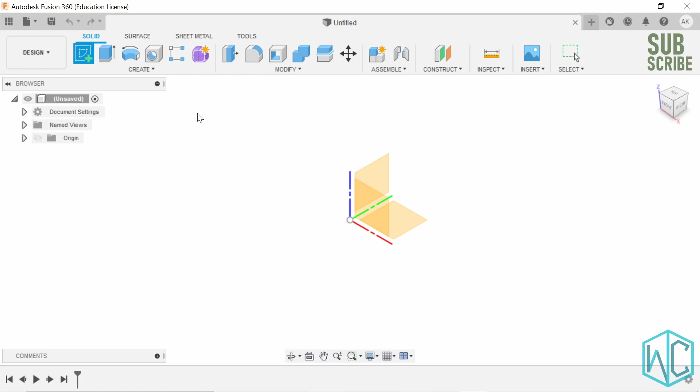Let's start with creating a sketch on the right plane. Use the line tool to make a rough shape of the cup that we want to make.

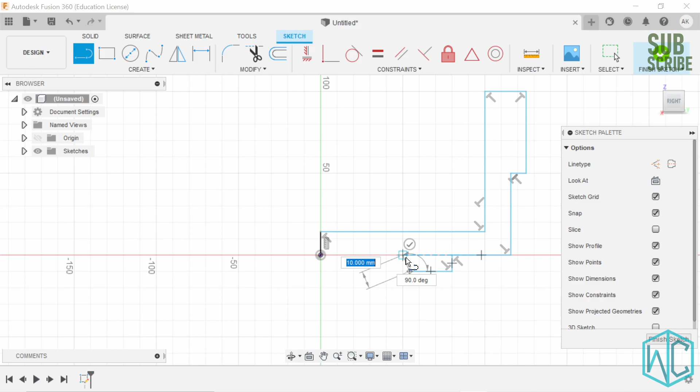Now that we have a rough shape of the cross section of the cup, let's give some dimensions. This is 4 mm. This is 4 mm.

This line and this line are collinear. Now, the small distance is 2.5 mm.

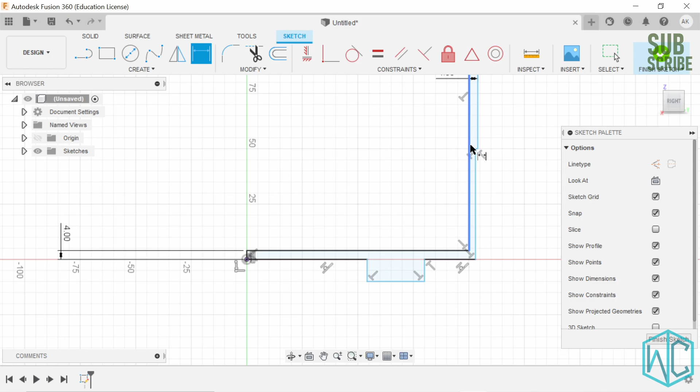This distance is 2.5 mm. This distance is 7.5 mm.

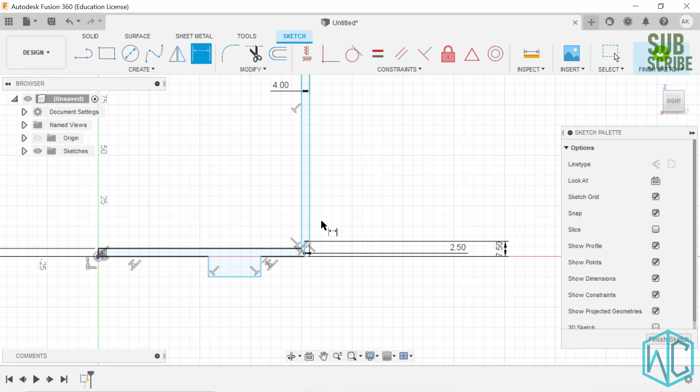This is 76 mm. This is 6 mm. This is 3 mm.

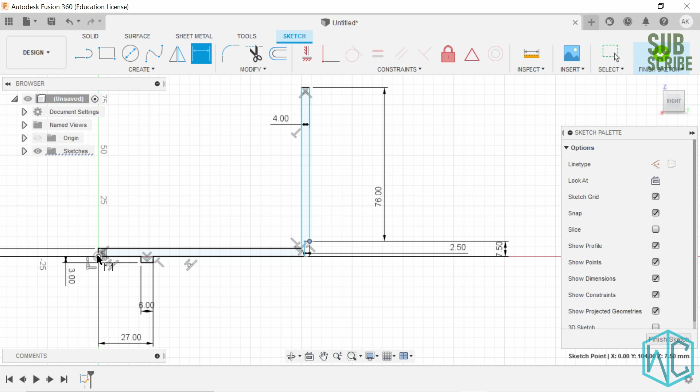This is 27 mm, and finally this is 39 mm. Okay, now that it is defined, let's finish the sketch and do the revolve feature.

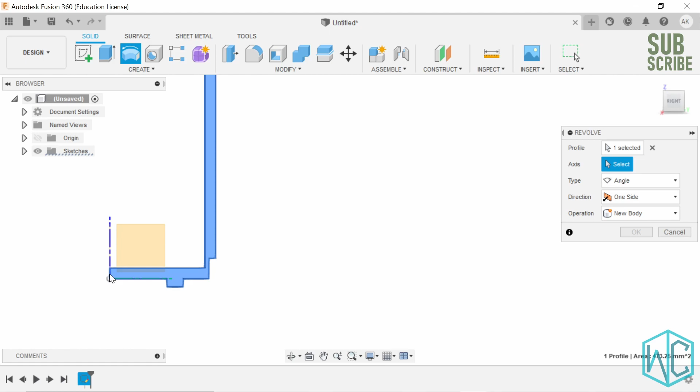The profile has already been selected, as you can see here. Let's select the axis as this one. A rough shape of the cup has been made. Click OK.

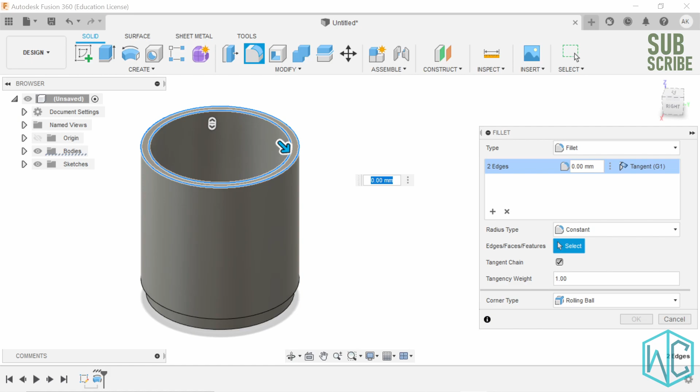Now let's give some fillets to smoothen out all the sharp edges. These edges get 2 mm fillets.

And this edge gets a 2.5 mm fillet. These two edges, let's give a 5 mm fillet.

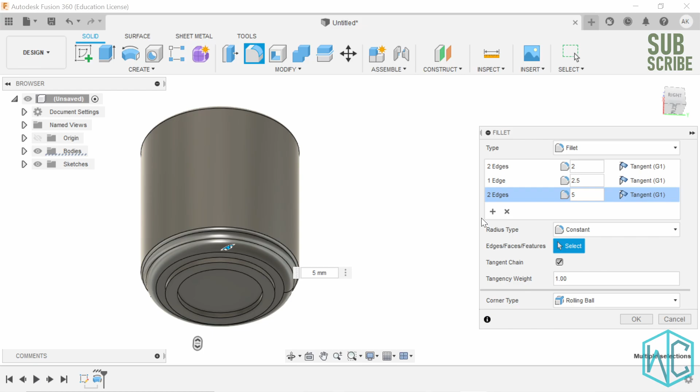And all these 4 edges get 3 mm fillets.

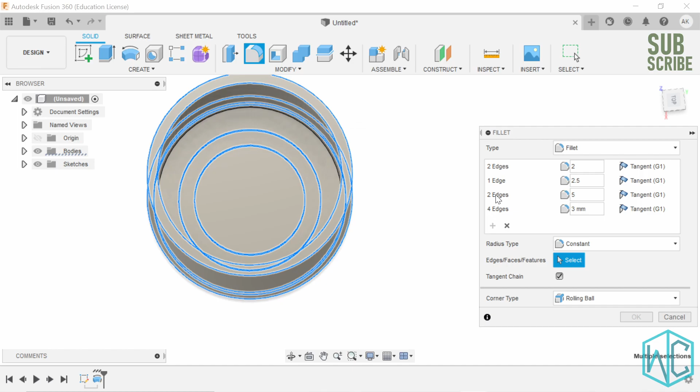Also, one more area to give a fillet is the inside edge. Let's first click OK here.

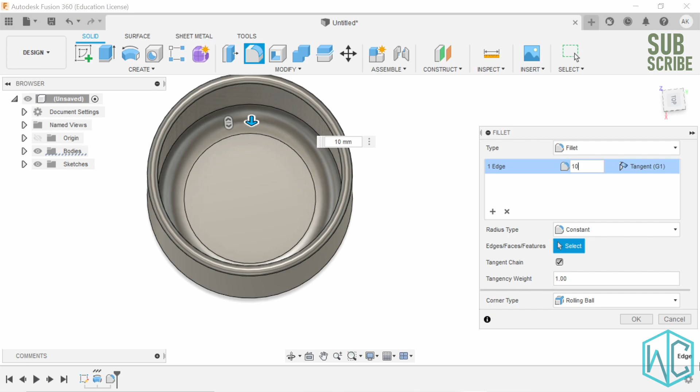Let's give a 10 mm fillet here and click OK. Now that's somewhat making the shape of a cup. Now what's missing is the handle of the cup itself.

So to make the handle, you can do it in many ways. One of the easiest ways is usually the sweep feature. To use the sweep feature, we need a profile sketch and a path sketch.

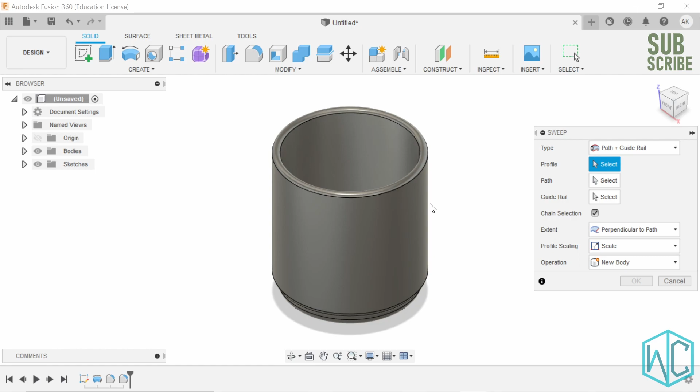I'll also be using a guide rail to make the handle. I'll describe why while using it. So let's first make the path sketch, inside the sketch we've already made for the cup.

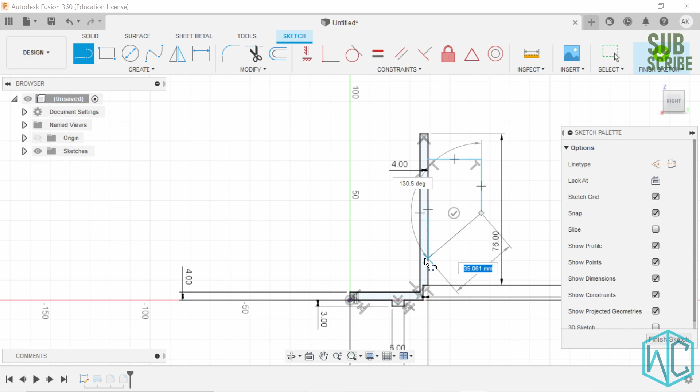Let's use the line feature again and draw a rough shape of the handle. And let's give some dimensions. This is 26 mm.

This is 30 mm. This angle is 50 degrees. This distance is 15 mm.

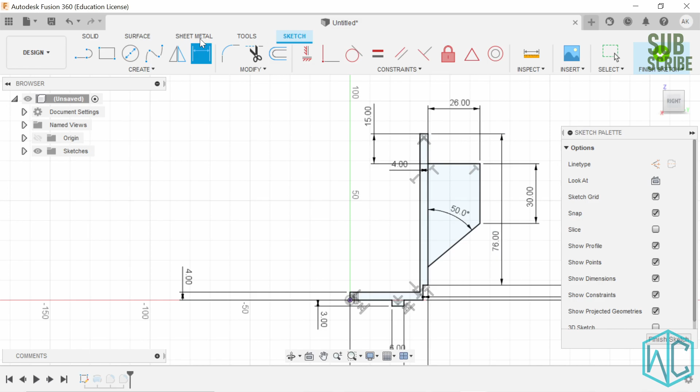Let's also give some fillets of 10 mm here, at both these vertices. Okay, cool.

Now let's click on finish the sketch. Oh, before that, I forgot to create the guide rail.

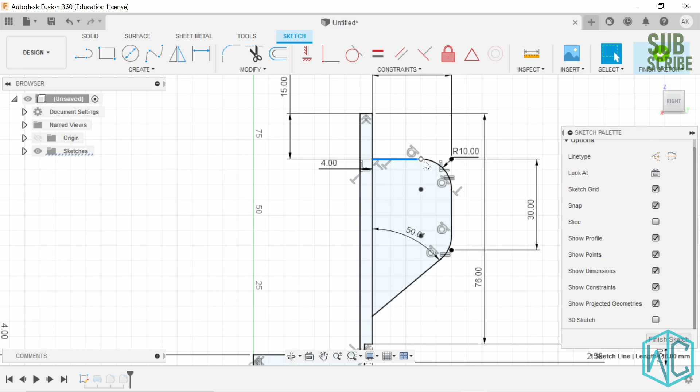For that, let's completely select the path sketch and click on offset. You can either use the shortcut here, or click on the drop down arrow and select offset.

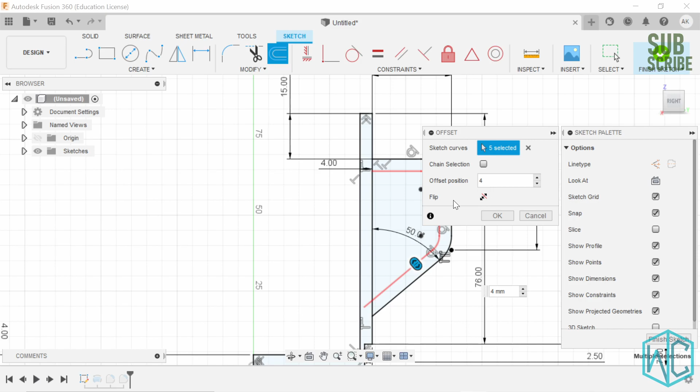Or use the keyboard shortcut O. Let's give an offset of 4 mm, in the opposite direction we require. So click on flip, then click OK.

Also, let's join this point to here. Now click on finish sketch.

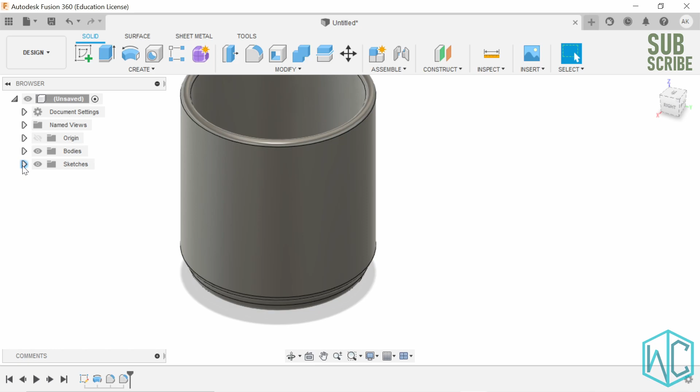But you can't see the sketch yet. To make it visible, click on the drop down arrow in the sketches menu and click on the eye option. Now you can see the sketch. Cool.

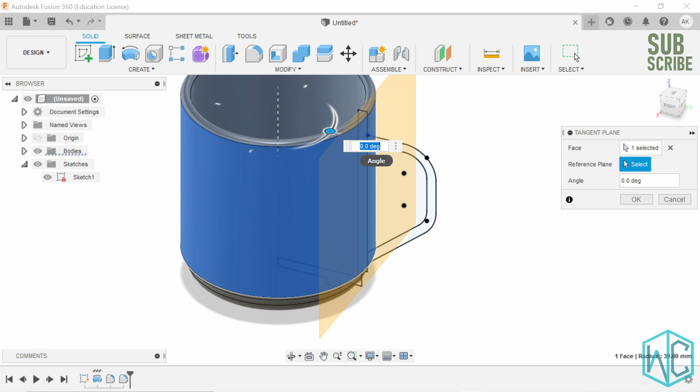We now require the profile sketch, right? To do that, let's first make a plane passing through this point and tangent to this, at 0 degrees, which is exactly the plane we require. Click OK, and start a new sketch on this plane.

Draw a center rectangle here. Now we require the center of this rectangle to coincide with this point, so select both points and click on coincident relation.

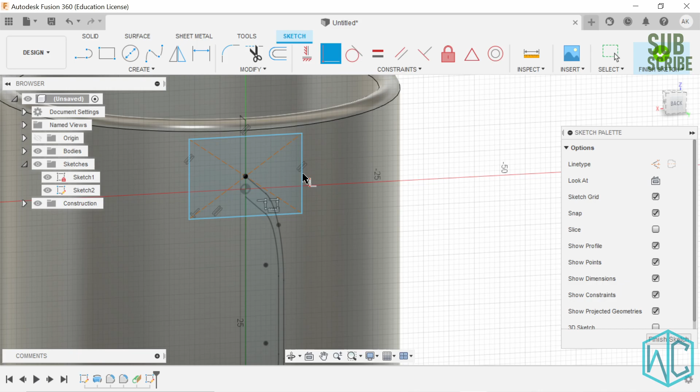And now at that point, we require this and this point to be equally coincident. Okay, cool, my mistake. Okay, let's look at this.

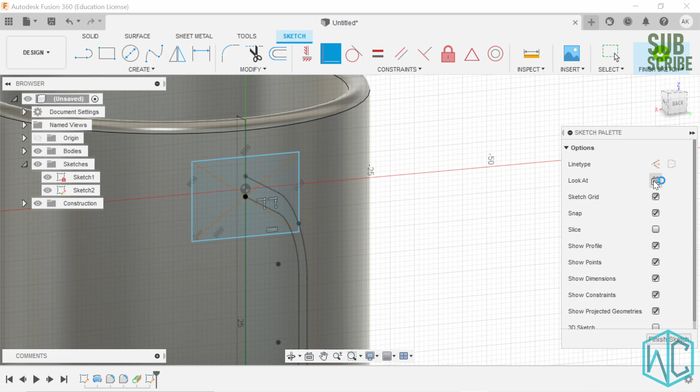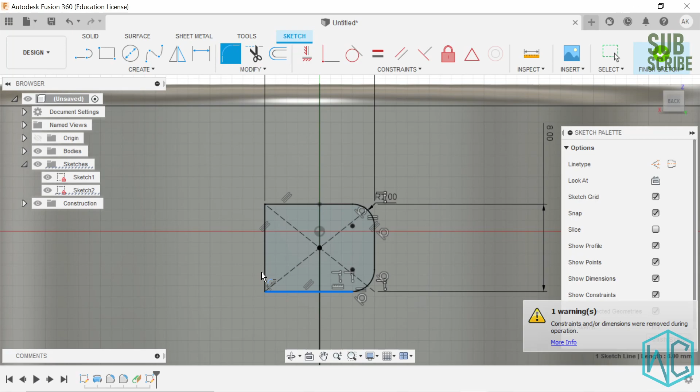Also give a dimension of 10 mm by 8 mm to the rectangle, and also give fillets to all the vertices of 3.5 mm each. Okay, cool, that's looking pretty good.

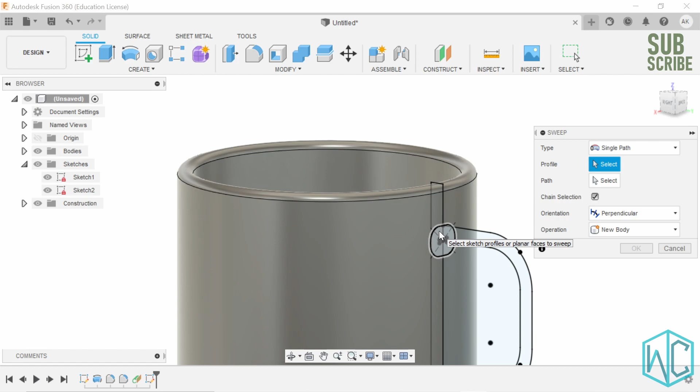Let's now use the sweep feature. First, let's just use the profile and path sketch and see what happens. Select the profile sketch and select the path sketch. You'll see that somewhat the handle is being made, but at the other end of the handle, this is not what we require. We want something that will meet at the cup and not intersect. This is not what we require.

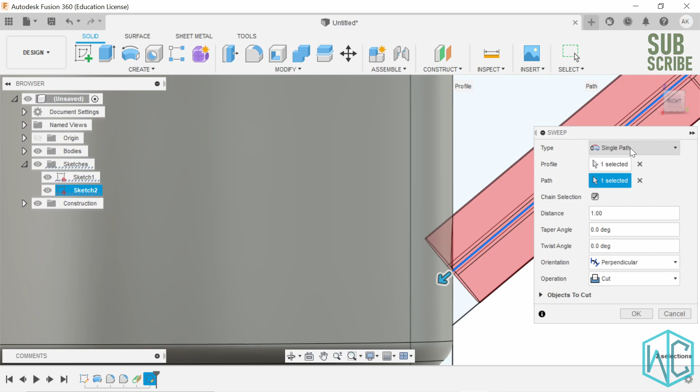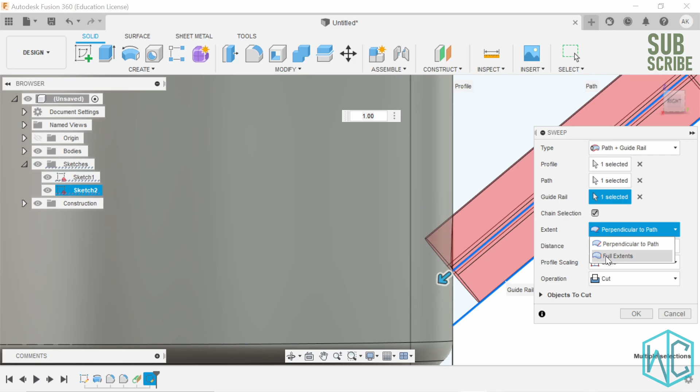So to make it better, we can give a guide rail. Select the guide rail as this line. Again, it's not meeting what we require, but we can fix it by selecting the drop down in the extent menu and clicking full extents. Okay, so now it's looking good, right?

Click on the join option here and click OK. Okay, now that looks right. Now let's hide the sketch first.

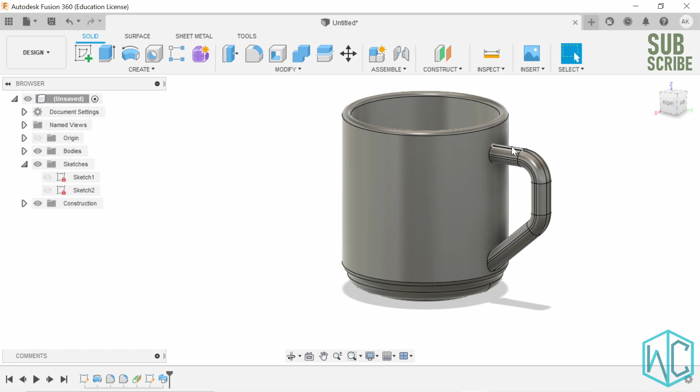Let's also give some fillets here to make it better. Before that, there's one more correction we must make. You can see there's some gap here, right? This gap is also present in the bottom part.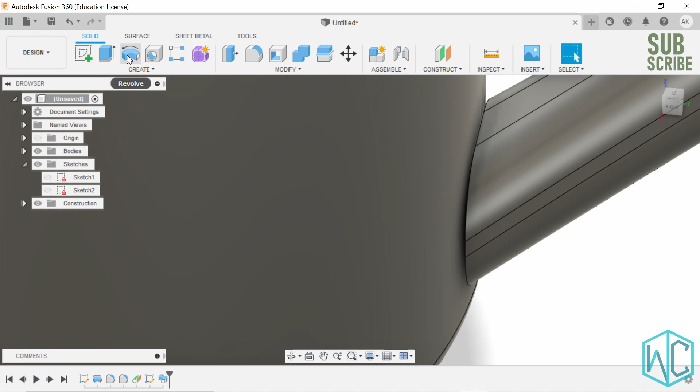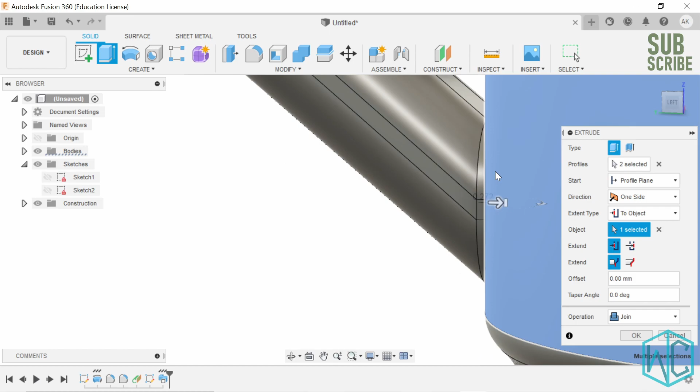So to fill it, let's use the extrude feature. Select these both faces and click on the extent type drop down menu. Click to object and click this object. Cool, now click OK. Select extrude again.

Let's go to home and click all these pieces. Select the object, click on the cup, click OK. Now it is connected, right?

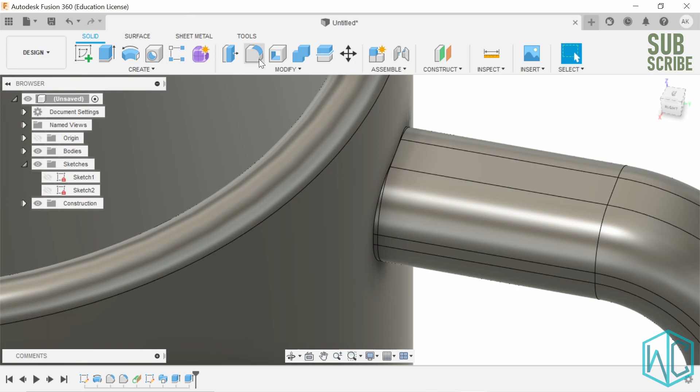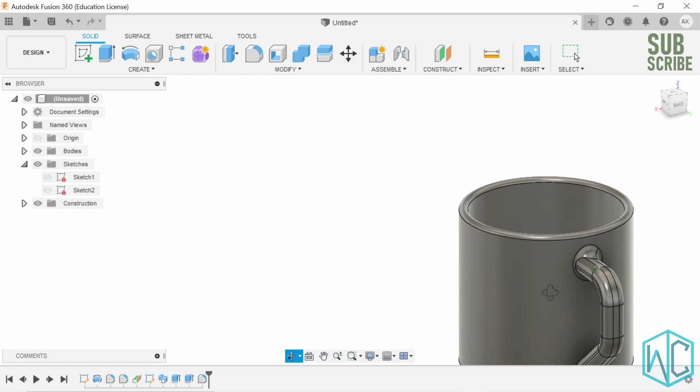Now let's use the fillet option to give some fillets of 10 mm here. Okay, let's change 10 mm to 5 mm. 10 mm looks too big, that doesn't look right. Let's delete it and make it again.

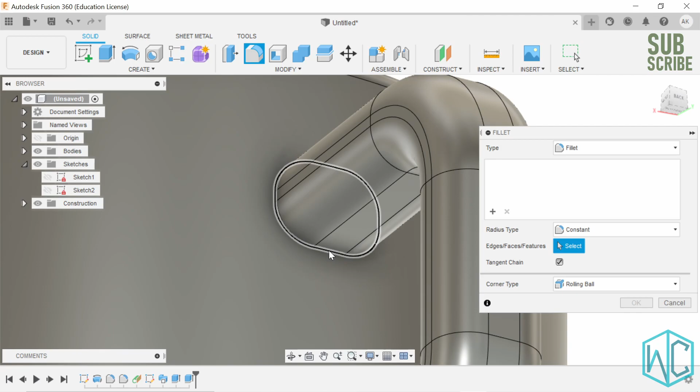This sometimes happens, though not always, so just be patient about it. Click on this edge, complete edge, go 5 mm, let's see. Yeah, that looks right, cool.

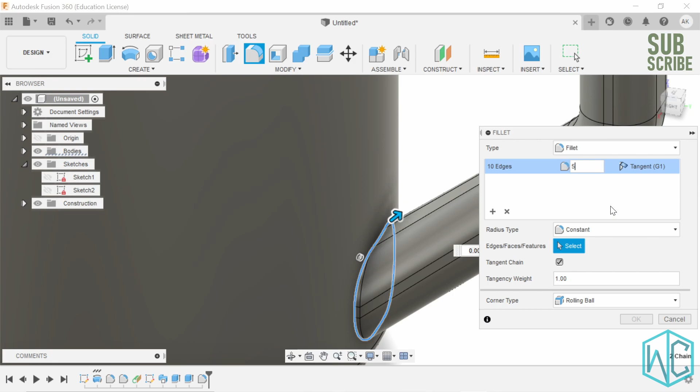Now let's give a fillet here also. Both these are just 5 mm. So let's give a fillet once more. That'll make it right. I tried it before. Okay, that looks about right.

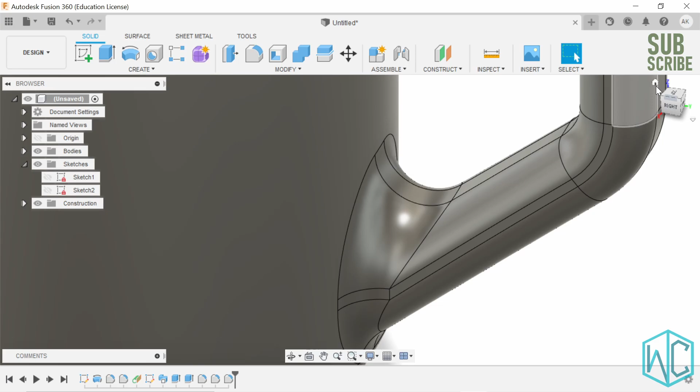Now the shape of the cup looks about right, precise. So now let's give some material.

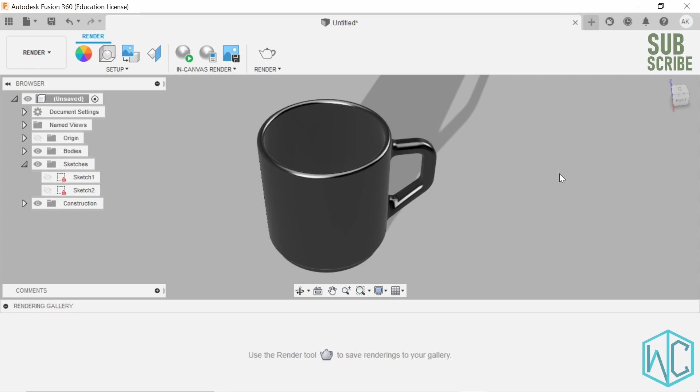To do that, go to the render option and click on the setup drop down menu. Click on physical material. Inside that, click on the in-this-design drop down menu. Let's give some ceramic material to it, let's give porcelain, you can give any material. Just drag and drop it onto the object.

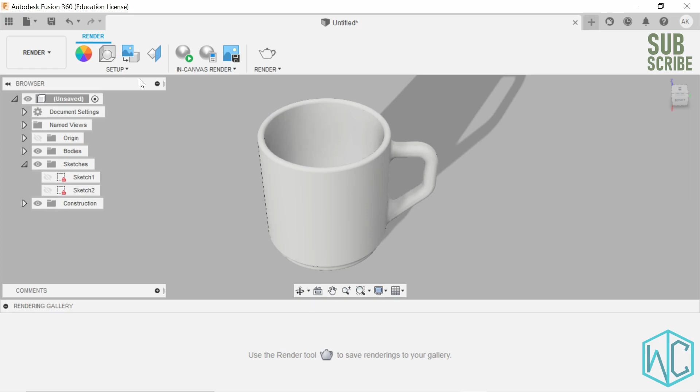Okay, let's close it. Let's also give some decal. You can either click the shortcut here, or go to the setup drop down menu, click on decal, and insert from my computer. I have already made the decal here, so select the decal, click open, and select the face you want to add the decal to. Click on this face.

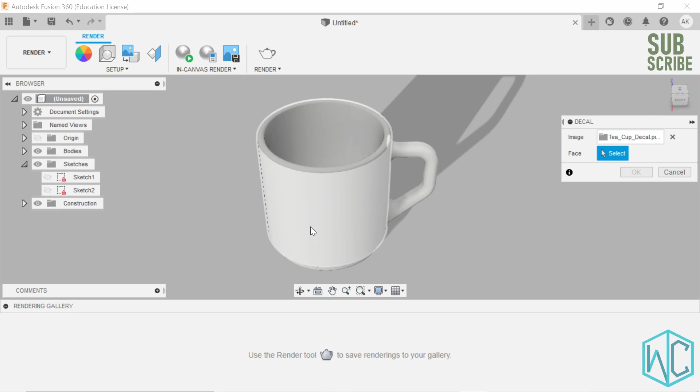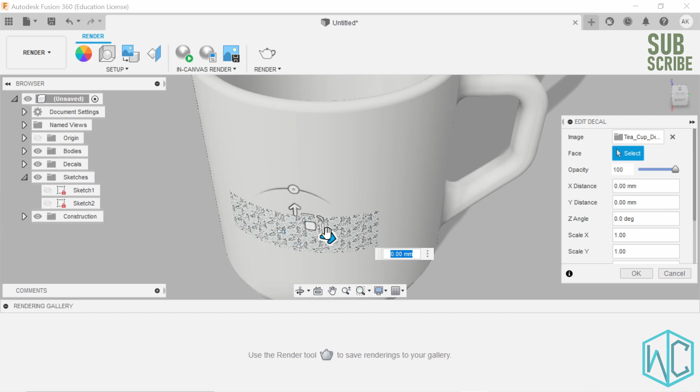I'm going to change this angle to 90 degrees to make it better. Let's edit the decal again. You can drag this to change the size of the decal, or use this one to diagonally change it. Let's just manually change it.

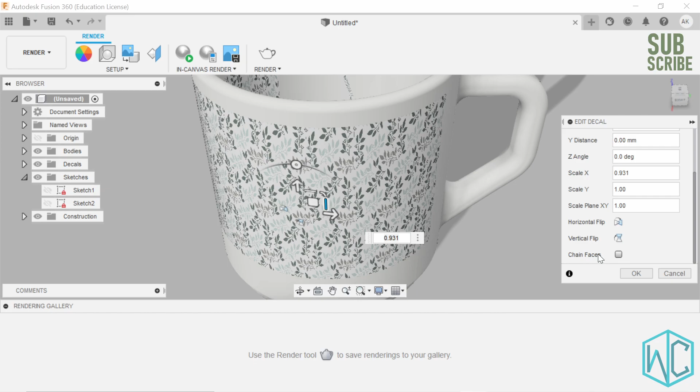One thing observed here: the decal is going into the handle of the cup. We don't want that, right? So just go down to the edit decal option and deselect the chain faces option. Now you can see it's not going into the handle.

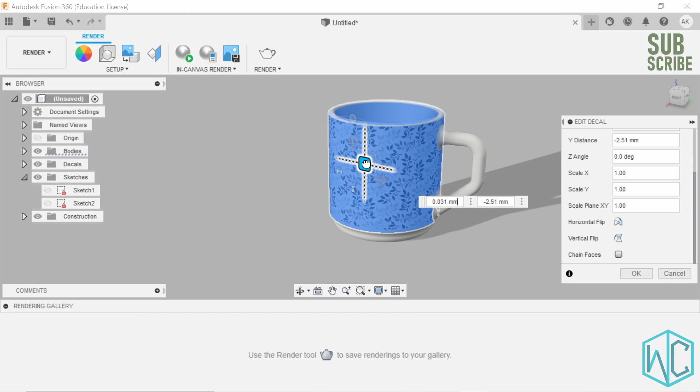Now let's adjust it so that it's covering the entire face. It looks all right, let's increase the length. Once you are satisfied with it, click OK.

And there you have it, your own cup. You can also do some rendering in the render option here, so let's go render it.